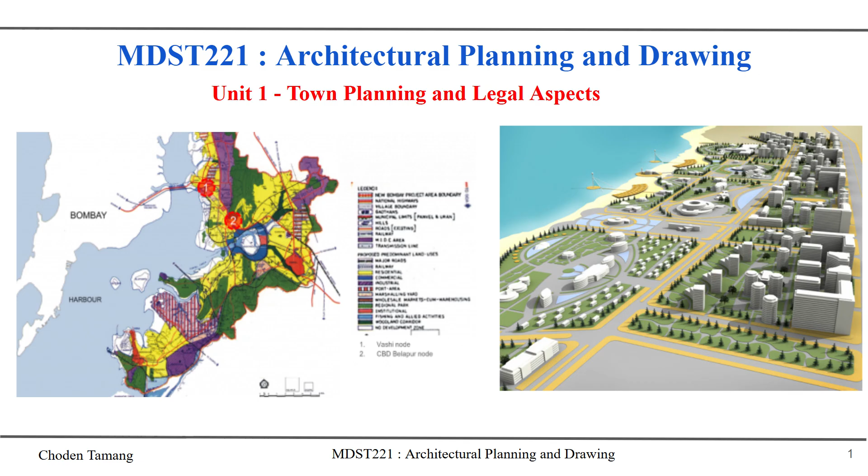Hello, students. Today we are going to start with Unit 1, that is town planning and legal aspect. In this lecture, we'll be covering the basic definition of town planning, why it is important to plan a town, and what are the different principles and objectives you as an engineering student need to know. So, let us move ahead.

In this slide, I want you guys to observe the basic difference between the two pictures, the right one and the left one. I want you to observe how visible is the road alignment, how the town is planned, which is a better planned town, and how can you say it? Just give yourself a moment.

If you carefully observe the right figure, the buildings are so perfectly aligned that the road layout is clearly visible. These are the road layouts. When you compare it with the other town plan, hardly some part of the road is visible there. It's also very curved and congested. This might be the road, and this might be the street lanes. So you can see the difference, right? You can compare how congested this town is, and this will basically lead to traffic congestion.

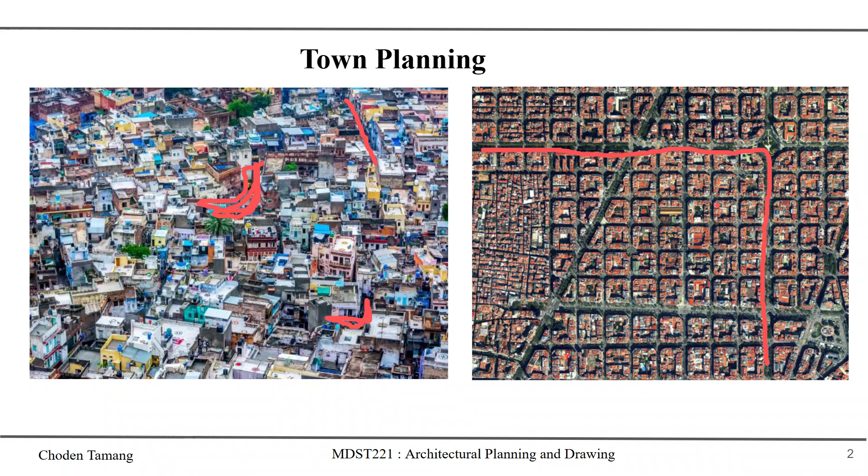Hence, this differentiation in both pictures is enough to show the importance of town planning. So, coming to the definition of town planning: it is a process of designing and regulating the use of land in urban spaces to accommodate structural system safely and efficiently.

This includes arrangement of various buildings and units in such a way that a person or society is highly benefited from the arrangement. When we talk about various buildings, it includes all the building categories given to us: residential building, educational building, institutional building, assembly building, business building, mercantile building, industrial building, storage building, and hazardous building. This is given by the National Building Code, which is important for us to know before moving ahead in this unit.

So the various buildings, and we have stated this term as unit. Unit is basically your road, park, utilities, amenities, which is important for the functioning and well-being of society. So when these two factors, your buildings and your units, are aligned properly, then it can be stated that the town has been planned properly.

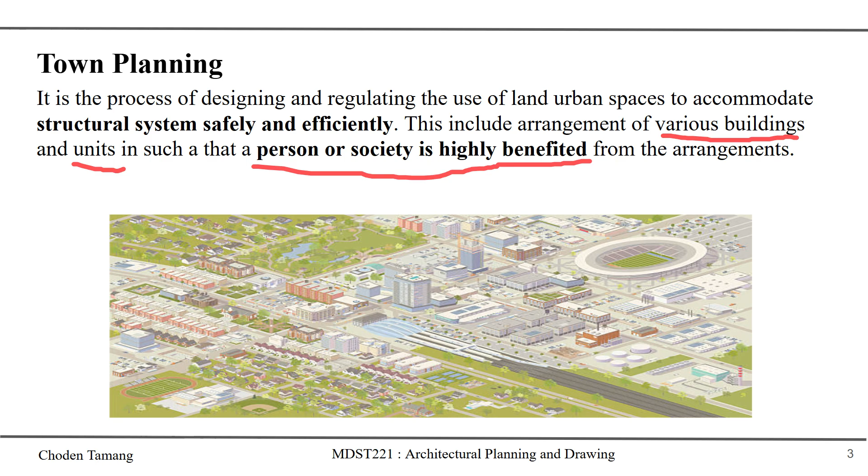So moving ahead, I've already stated this building category given by the National Building Code. All the buildings are denoted by a particular alphabet, that is A, B, C, D, E, F, G, H, J. So in further units and classes, if I say building A, that will fall under your residential building. If I say building H, that will be your storage building. You should be well equipped with this knowledge. Even in many government exams, questions from this portion are very relevant, so you should know this.

Institutional building is your organizational building that is not basically residential, such as your hospital, government offices. Your assembly building is where people assemble, such as your parliamentary house or your stadiums. That is basically your assembly building.

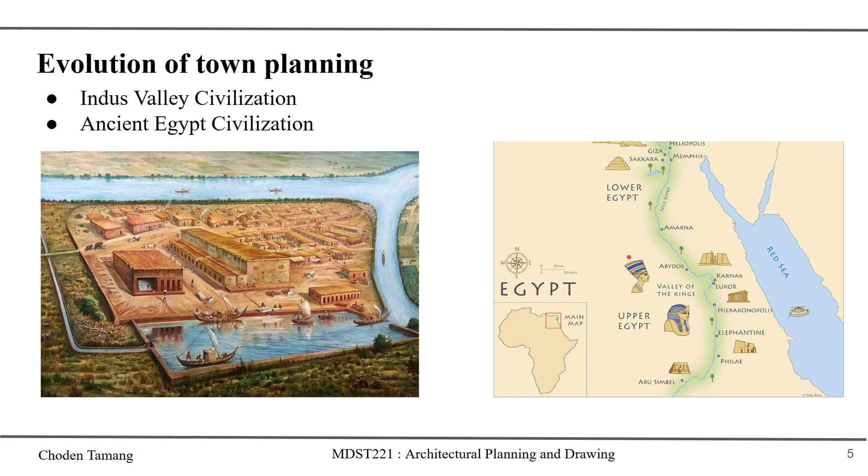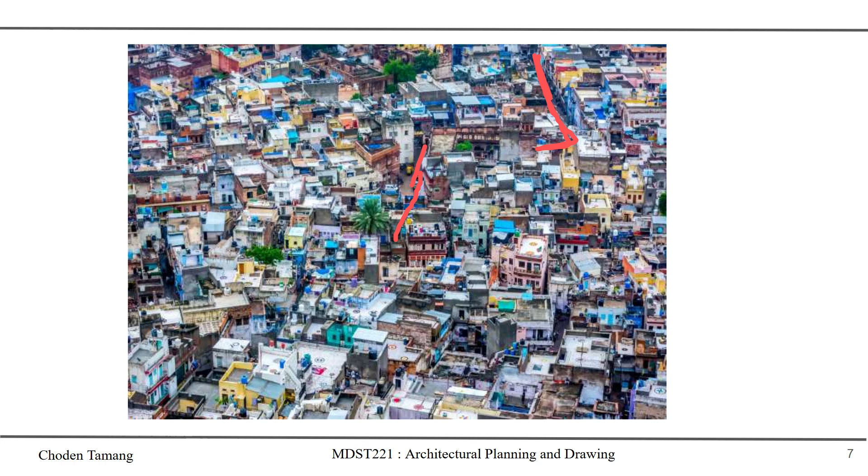It is already visible, and pollution also. The scattered planning also leads to improper drainage facilities. If there are improper drainage facilities, that will invite flooding. So poor waste management, that will basically lead to different pollutions, health problems, and hence lead to overcrowding. And overcrowding will impact the health of the whole town, and a healthy town will be converted into a slum.

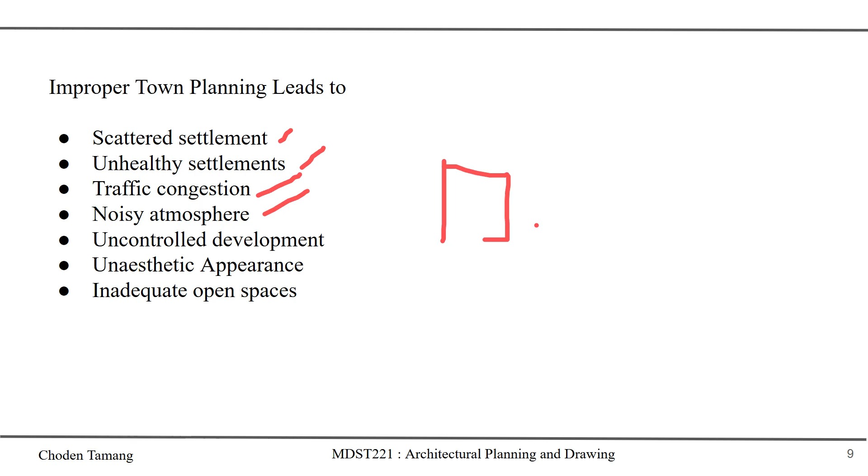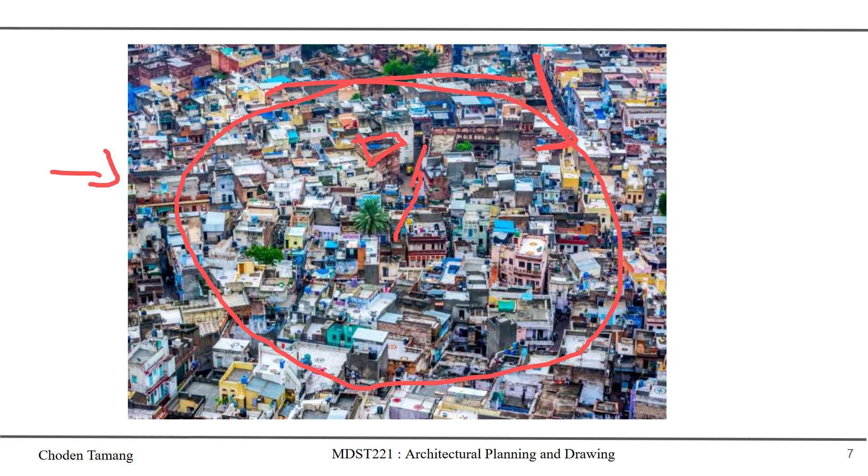How miserable the arrangement looks like. So there's an unaesthetic appearance that comes into the box, and inadequate open spaces. You can see there is no open space out there. So that is the problem.

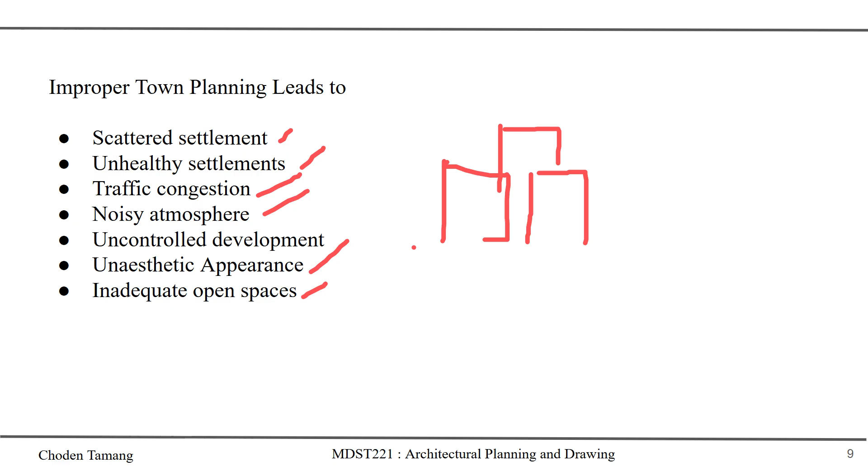So what we can say is that proper town planning leads to uniform settlement, you can say healthy settlement, no traffic congestion, peaceful environment, aesthetic appearance. The appearance of that plan was very beautiful, right? And adequate open space - it had many open spaces, proper ventilation you can get in this plan.

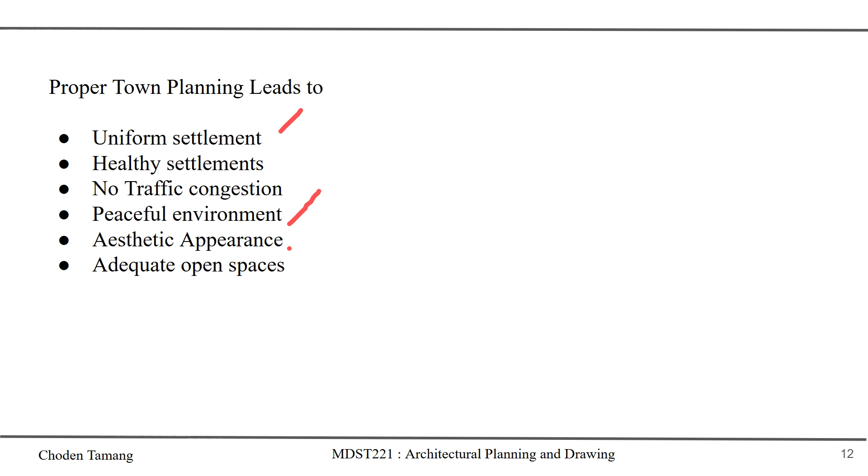Let's move ahead to the objective of town planning. So the basic objective of town planning is beauty, convenience, environment, and health.

Coming to the beauty part, your planned town should be aesthetically appealing and a brand of attraction to industry, people, or visitors. The utility should be such that people migrating to the town should have no problems - for example, the water facilities, the electric facilities, the road facilities should be top notch so that people visiting should have no problem, and that town should provide convenience. So they visit back, or the industries, out of the aesthetic or the convenience, can invest upon that particular town.

It should also be planned in such a way that the environment of the town should melt away the stress of the residents residing in the town itself. The environment should be very peaceful, such that a person residing in that town, seeing that environment, their workload stress from a 9 to 5 job should just go away - that's how the environment should be.

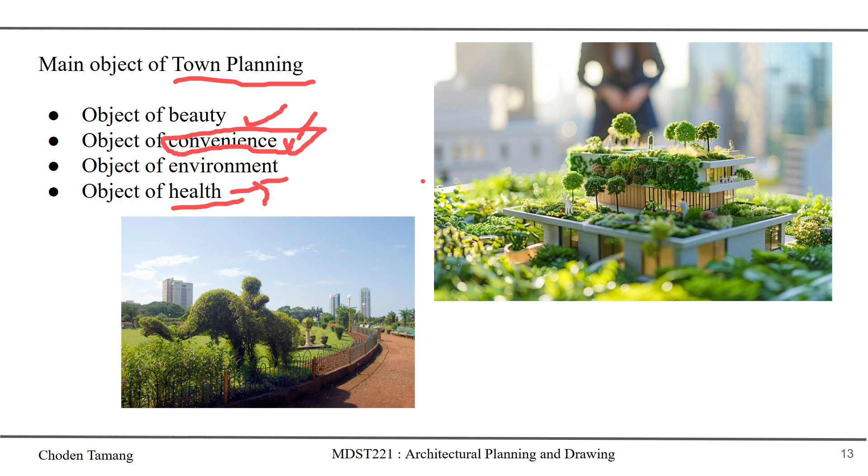So now, to achieve the objectives listed, we have some principles of town planning that we have to follow. The different terms are: green belt, housing, public building, recreation center, road system, transportation facility, and zoning facility. These principles serve all these objectives. We shall be discussing this in the next lecture. Till then, if you have any queries, you are free to contact. Okay, thank you.